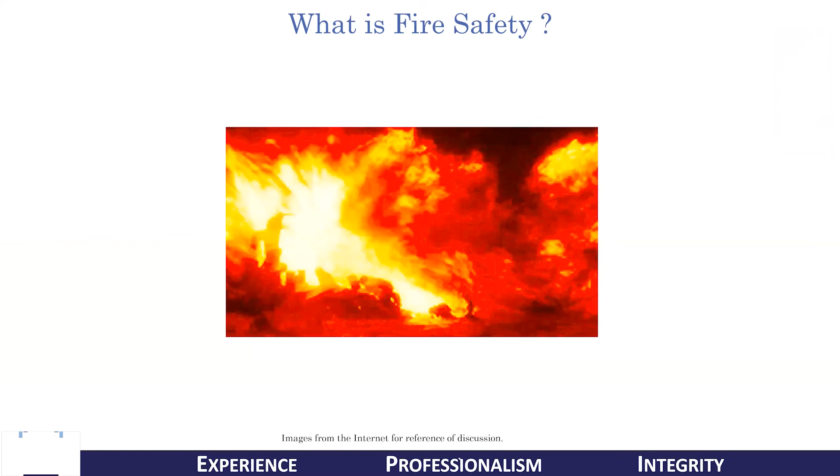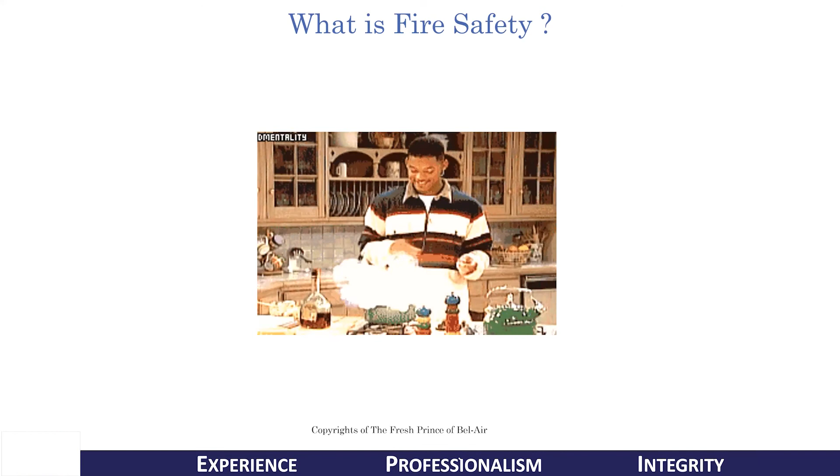Let's begin with understanding, and I'm going to talk about fire safety. Let me break the myth to all of you that it is not always a dramatic event that brings fire into a building. It is actually small and minor accidents that sometimes become a very, very big fire incident. Our focus is to make sure that in all the aspects related to all the stakeholders of building and construction, these small fire incidents do not become a big fire accident.

All of this is actions and thought correctly put at every stage, right from designing, when we are designing something, including building and construction when the construction is being done, and right up to when we are furnishing, planning, demarcating, rebuilding, as well as the occupant who comes in and wants to live, wants to occupy, and say, wait a minute, I want this here, I want this there, all through the life cycle of the building, right from designing or dream stage, as I would call it, and right up to occupation. There are several aspects where fire safety and other aspects of longevity and quality of a building come into practice.

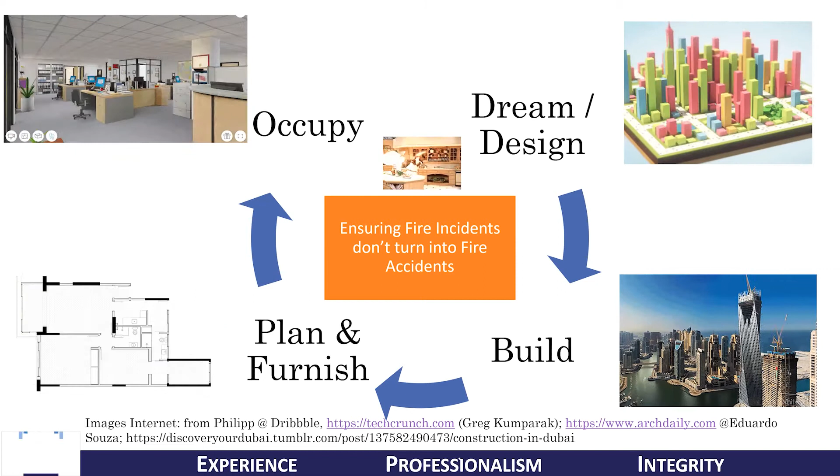Very often, it is easy for us to say, well, the building is designed as per the code, the building code. But it is extremely important to question and understand throughout the four phases of design to occupation whether these codes are current, are updated, and are factoring in some of the learnings, some of the accidents, some of the failures that we might have seen just a few months ago.

We all know that the problem of lag in change of codes, change of mandatory regulations, exists in every country. This is the reason why it is critical and important to have additional technical specifications, which are often written for all the projects that you can think of or bid for. So once we have this backbone ready, we have a code which has been published with decades and decades of experience of people in a given area or all over the world. But also in airports, malls, large occupancies where international consultants are involved who bring in their learnings from past accidents would always bring forth the latest, the current requirements in the form of technical specifications.

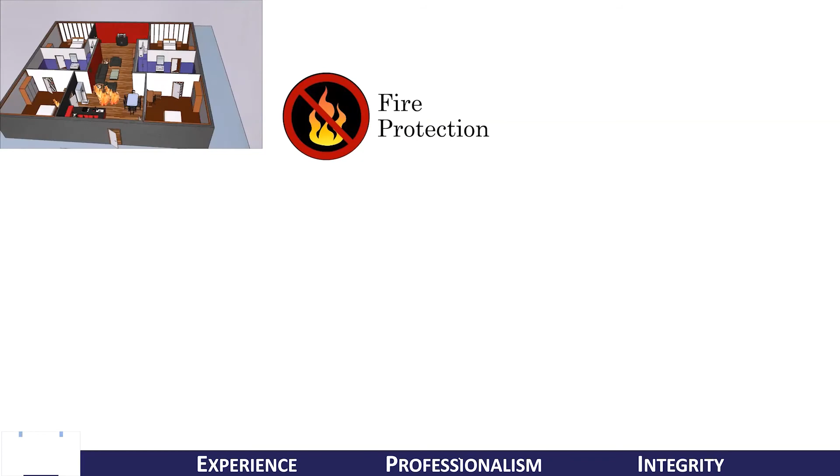With this as a background, let me explain, from my experience, how fire safety is achieved across the world. The concept of fire protection starts at the design phase, when people are planning the fire and life safety plan of any construction. They want to make sure that if a fire accident happens, as you can see in the video running on the top left of your screen, it is designed in to make sure that this fire does not grow into a big accident. How is this done?

The two concepts seen everywhere in the world: one is what is called active fire protection. So all the components, systems that come into action, that come into activation, whether they are detectors of fire, smoke, or sprinklers, get activated the moment they sense a fire and raise an alarm, call the fire tender, evacuate everybody.

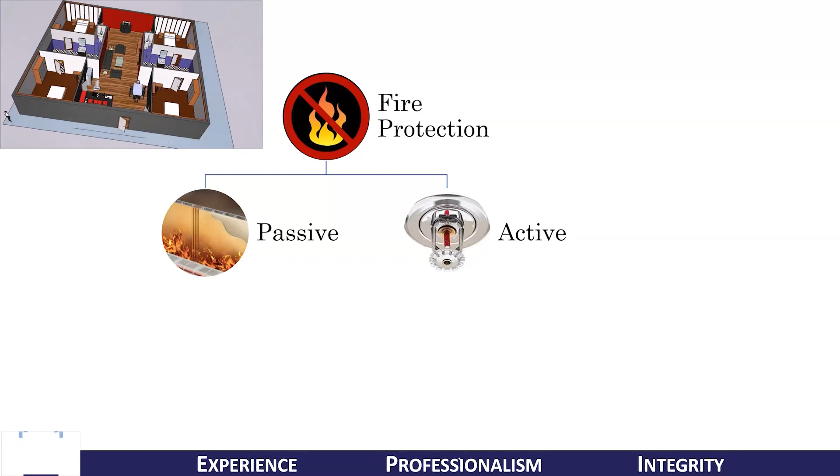All these systems which need to function properly are called active fire protection systems. And another equally important, and sometimes not given as much importance, are passive fire protection systems.

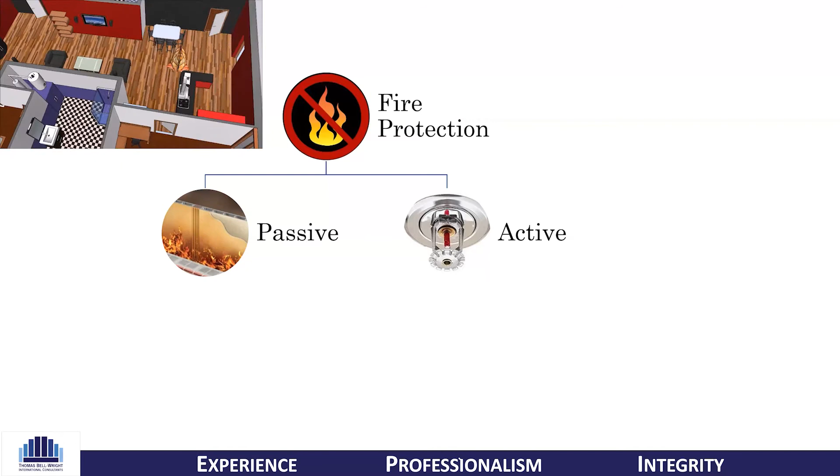What are these passive fire protection systems? Well, the concept is that if there is an initiation of fire anywhere in the building, in the house, on the floor, it should be quickly contained and compartmentalized in the section where the fire has happened so that the fire does not grow and escape all around.

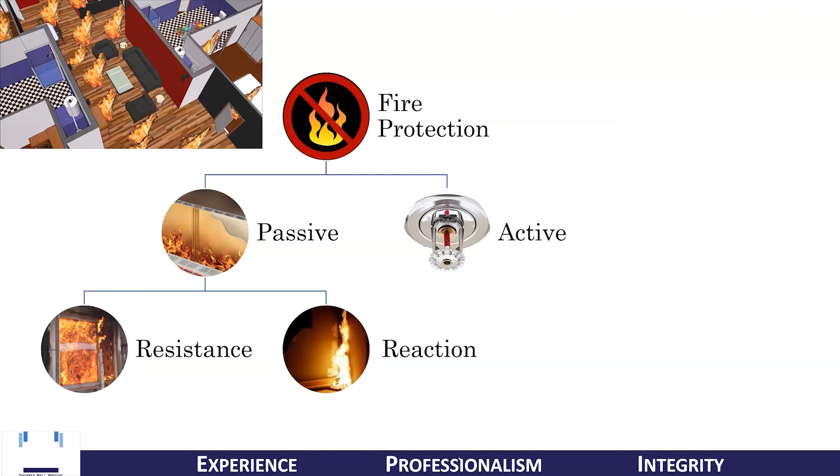This concept, which I will explain further, along with making sure that the interior finishing materials, the fire load, or the products, components and systems like upholstery and other things which are inside, do not react quickly to increase the fire and make the smoke grow.

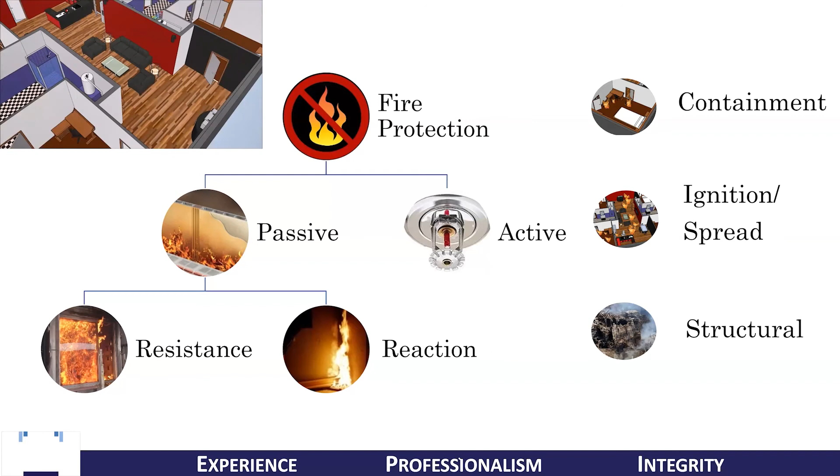So as we talk about containment, we talk about limiting the ignition, limiting the spread, as well as a very important aspect of structural fire protection, which means that the structure of the building should not lose its integrity if the fire temperature around the structure goes more than, let's say, 500, 700, 800 degrees, and the structure does not collapse, almost like the 9/11 tragedy that happened.

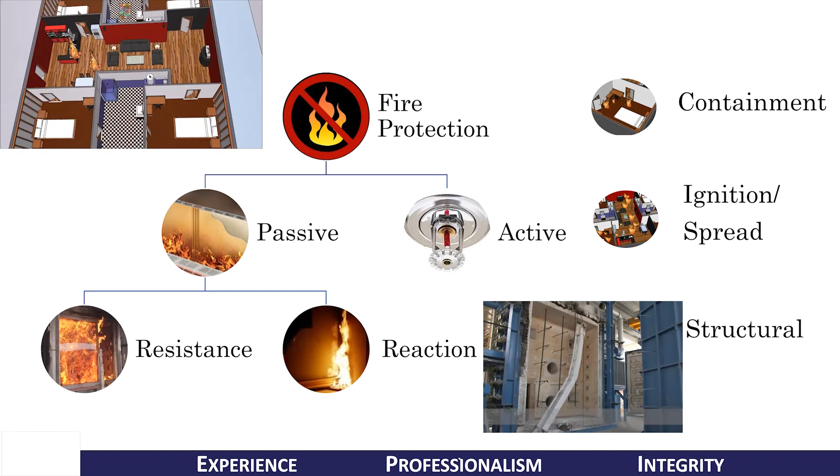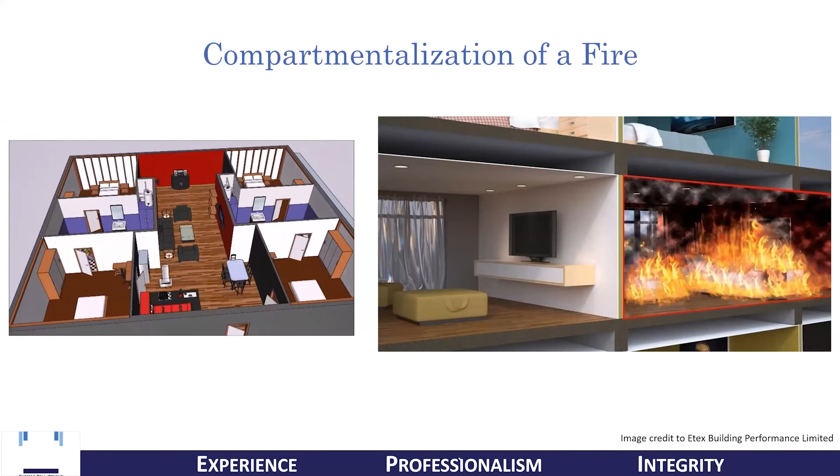So how do we really check that this is getting done? We start with, of course, having a test. We would test the compartmentalization by using a fire furnace.

What you see on your screens is part of our fire testing lab. And this furnace recreates a scenario, an environment of a fully developed, fully grown fire.

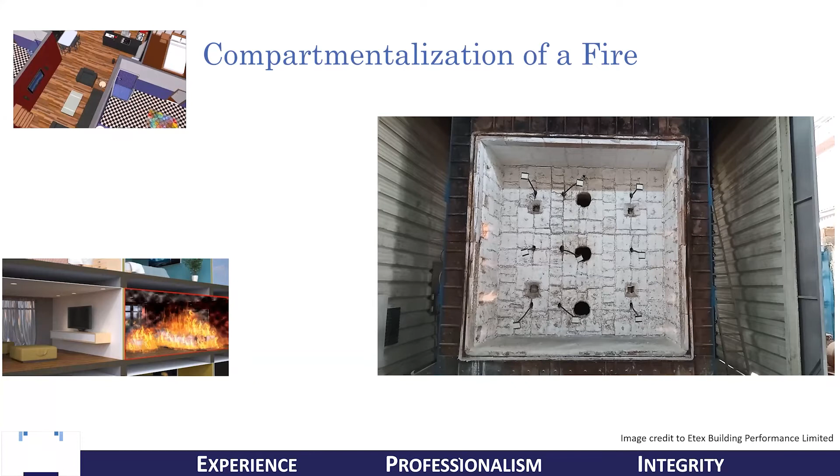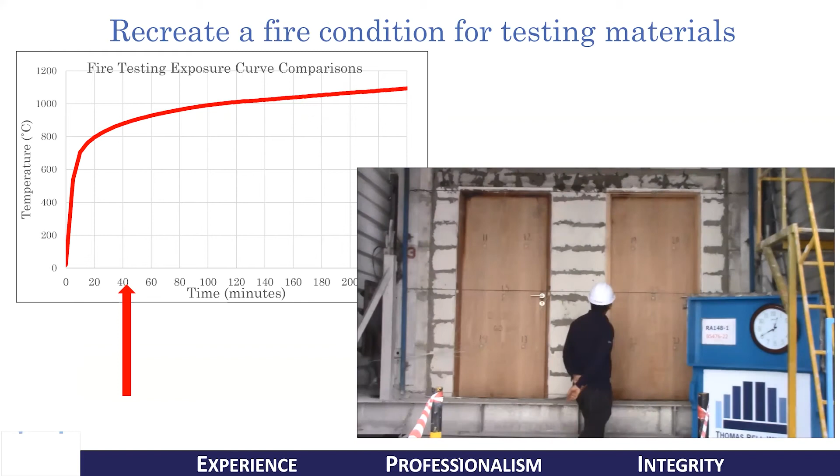With the help of this furnace, we are able to check by installing a compartment or a mock-up of a compartment. This could be a fire door, a wall, a damper, a duct, a fire stopping, or one of several different aspects of building and construction, which ensure that the compartment, which has been designed and installed correctly, is maintained for the given duration, which could be 1 hour, 2 hours, or 3 hours - enough time as per the design to evacuate the complete occupancy and get the fire tenders in who will control the fire.

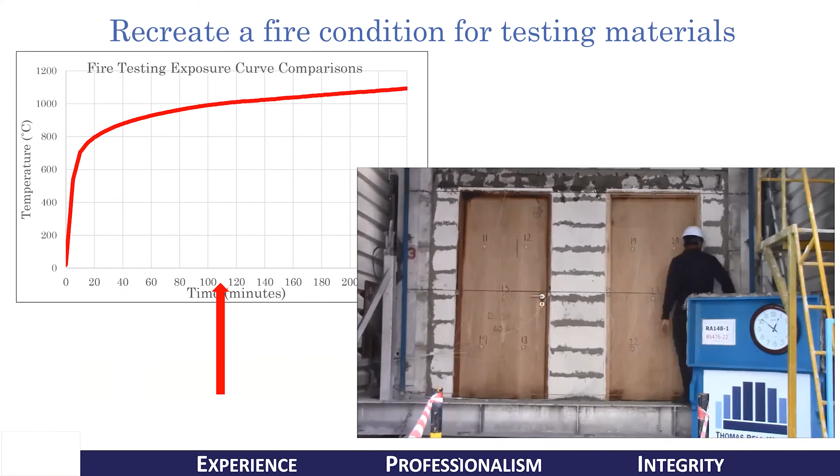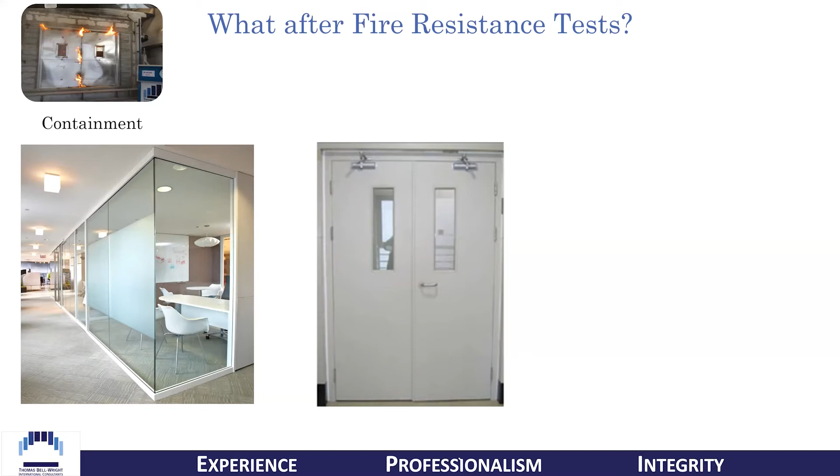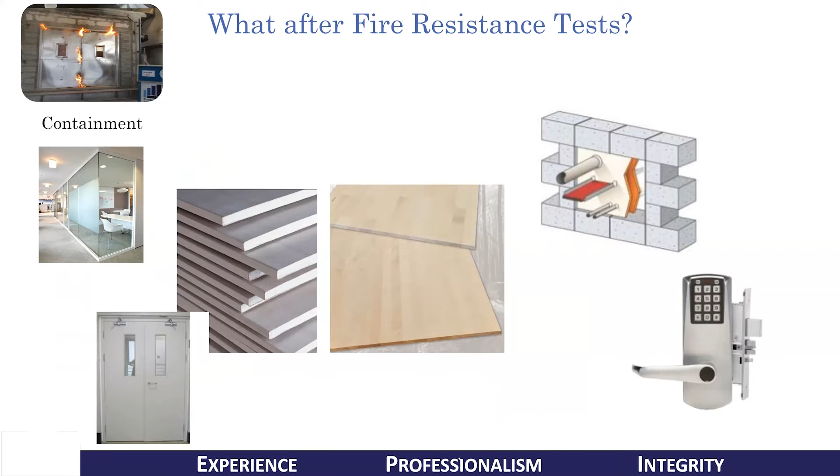Now, while we know that this is how a fire test could be done in a facility or laboratory like ours, it is very important to understand what happens when you conduct a test, because you can test a mock-up of a door or a partition, but what is this built of? You would have wooden planks, gypsum boards - so many aspects that come together and build a fire partition.

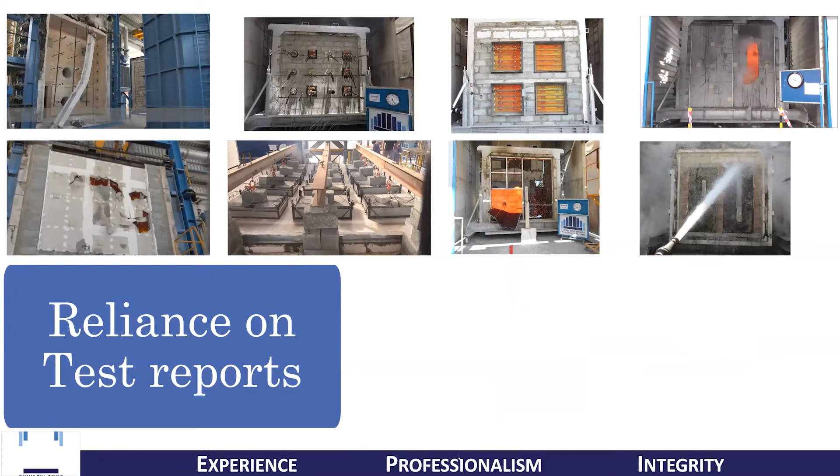But often these are manufactured in a manufacturing location and installed at the site. So how do you make sure that what the test has been done in the laboratory, and you see a test report on your table, is representative of what you will get on the site? What links the test report with the materials coming in at the construction site?

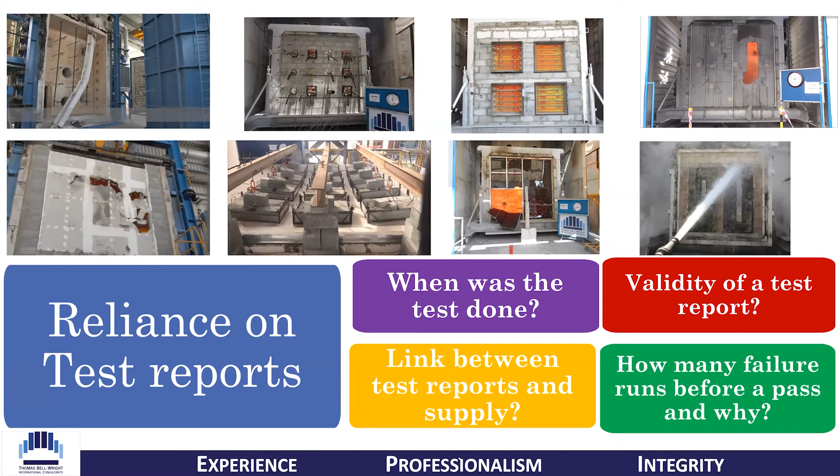And this is key across the stakeholders of the construction process, from one end where you have the National Building Code or the technical specifications saying materials and components need to comply with certain test methods. How do you make sure that a given test report, done in a given laboratory, is representative of what is happening at the construction site?

And this is where I take up my first case study very quickly - how do you ensure, with an example of a fire door, that all aspects - design, components, materials - which were listed in a test report are the same as what is happening on the construction site.

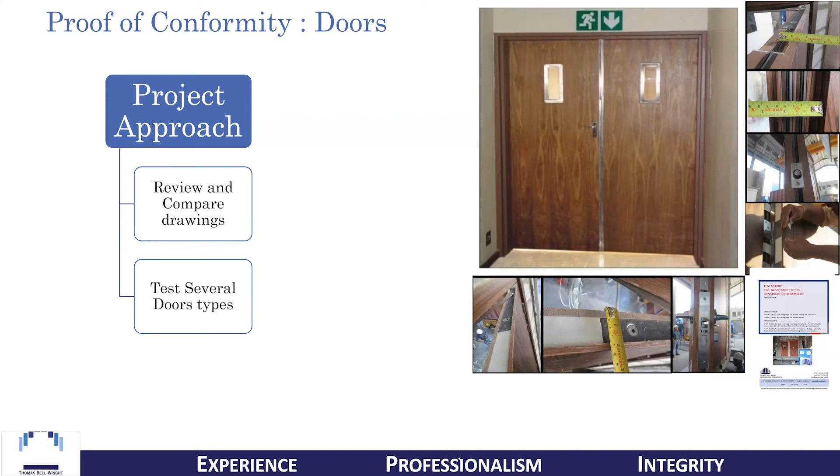So one of the very tedious approaches which some projects take is that for each construction happening, the subcontractor or the consultant will select certain doors and randomly send them to the lab to do these tests. And then there is another approach, which is the supplier approach - there is something called certification and listing.

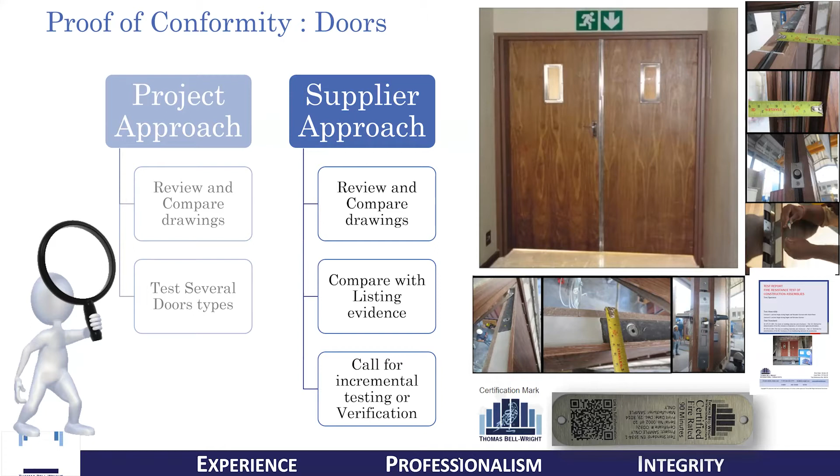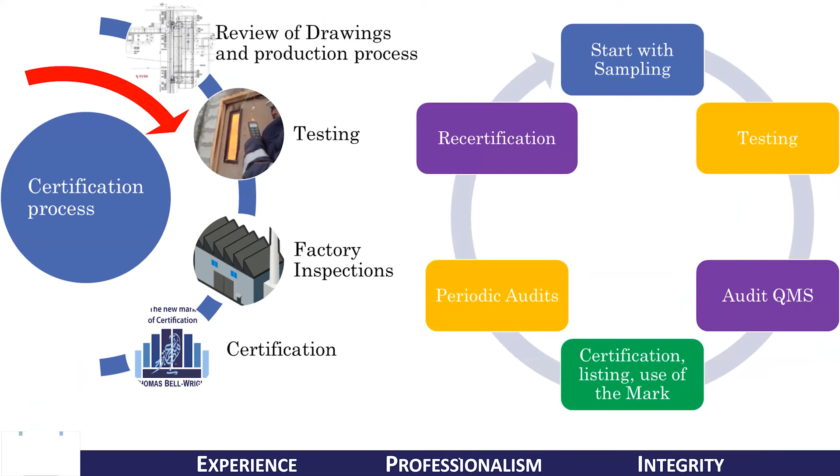This certification and listing is often done to ensure repeatability of offering, as the manufacturer's facility is audited regularly. What this audit typically results in is a verification or assurance that each time a door manufacturer, board manufacturer, or any product manufacturer produces a given product, its details can be verified on an online certification directory.

And this certification directory, whose details are often linked with a certification mark or label which could have traceability, will list every aspect which can be verified at the construction site.

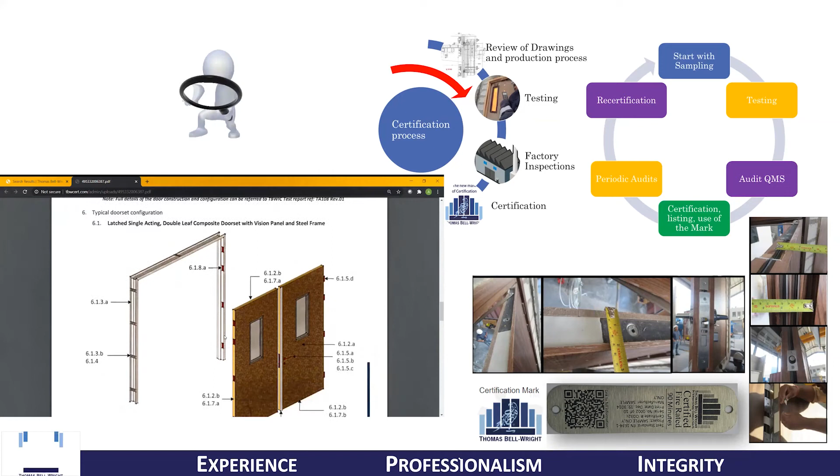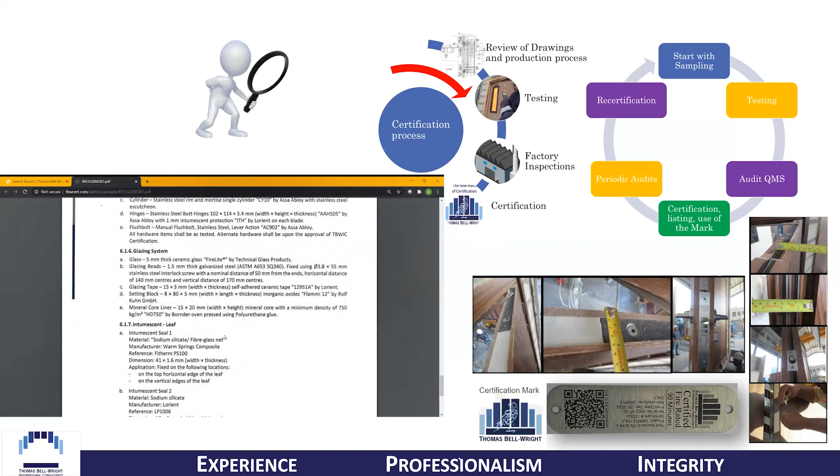In the small video running on the bottom left, you can see the listing of a fire door that we have certified to comply with UL standards or North American standards. All the details of the door are made public. You can review this at the certification directory, tbwcert.com. Not only can you verify whether the certificate is current, it will also verify that the certification body is auditing the factory regularly, so if there's a label on the door, all the details are public and can be cross-verified from the construction site. This level of assurance is needed now and is mandated in most countries.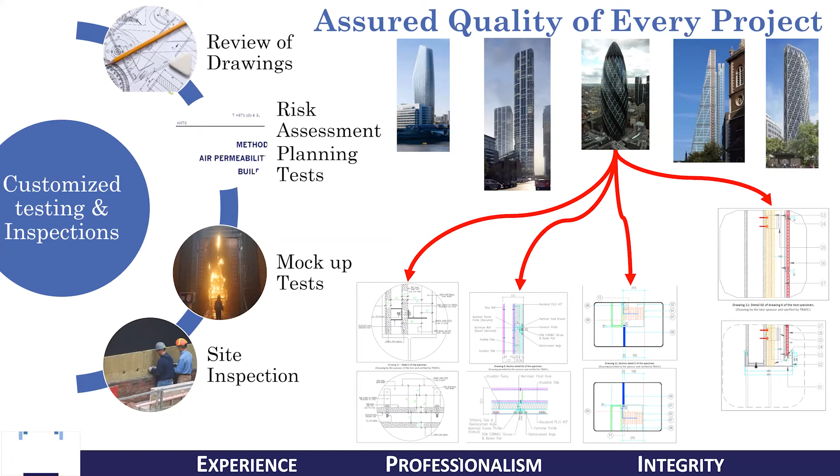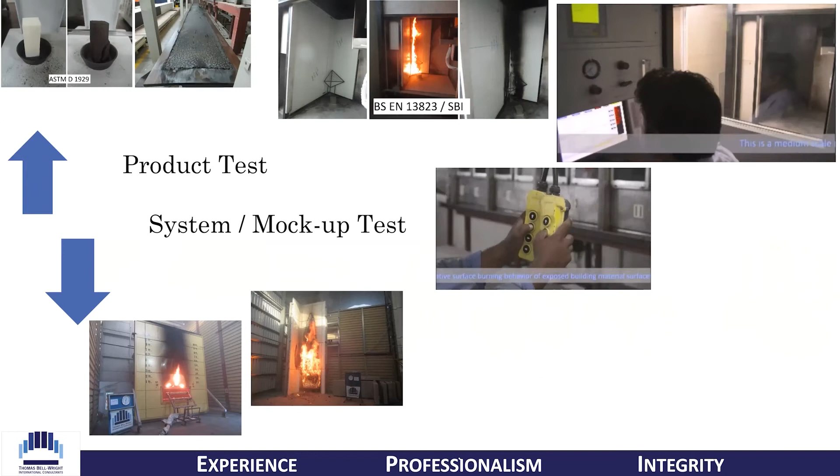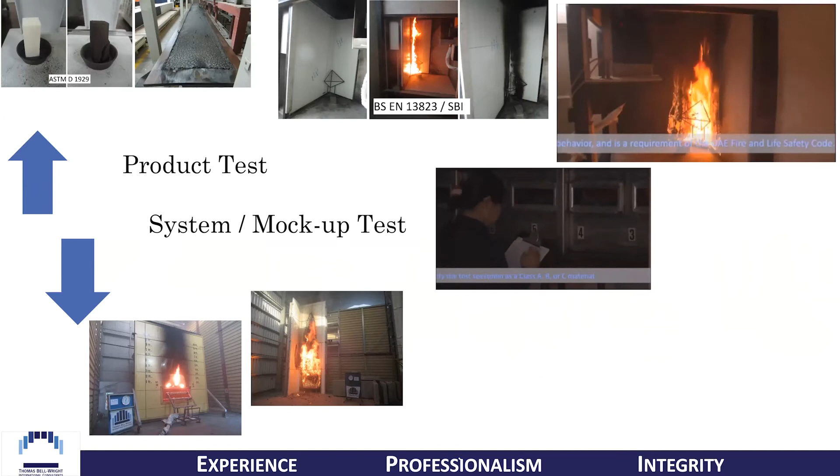Moving to one of the hottest topics of today, which is facade or cladding fire safety. A very often ignored aspect is that the whole facade which is built can be represented by just one or two tests, and that may not be the case. You could do material tests and validate material behavior, which could be the facade element, the insulation material, the sealants, and so many other aspects, which you could test for ignition or flame spread as an independent material.

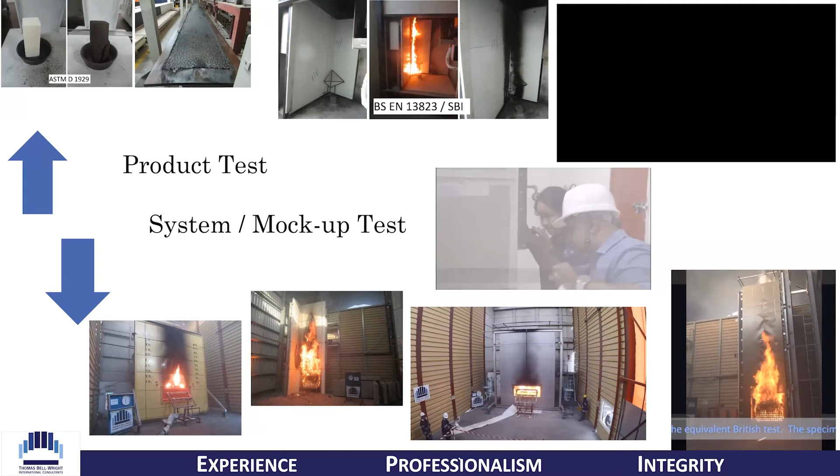But it's equally important to understand that in every building facade, there are sometimes a few dozen, but sometimes hundreds of different design details where components and materials make up different subsystems. These specific subsystems need to be validated by doing several mock-up tests, not just one, but several large-scale fire propagation tests.

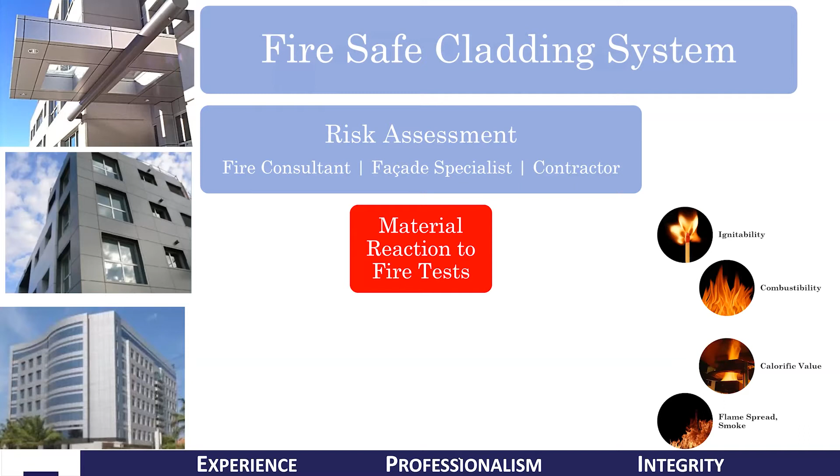So in a quick summary, to ensure the cladding system is fire safe, it starts with the fire consultant, the facade specialist, and the contractor doing a risk assessment, checking various reaction-to-fire properties, not just by tests, but by ensuring traceability of materials using certification and listing, and evaluating which sections of the facade or building envelope are high risk, because components and materials with low ignition temperature, high calorific value, and very high flame spread could be coming close together in a given section of a facade detail.

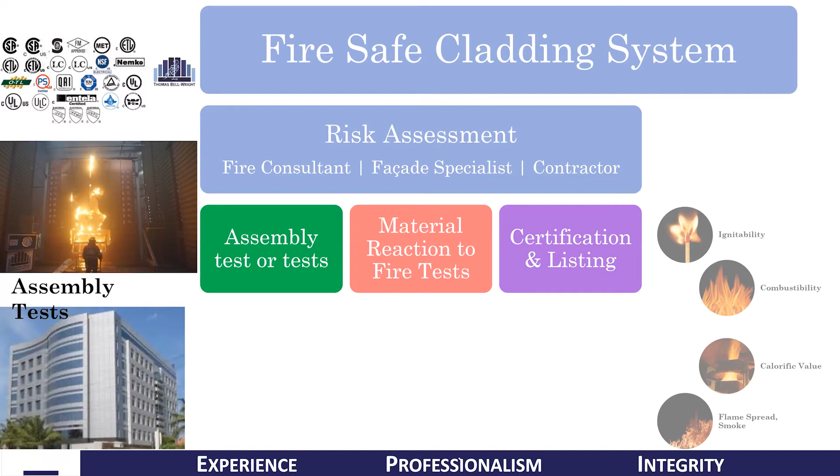And these need to be mocked up and validated to ensure they will not cause a big fire accident. But this validation is not the last step. Someone needs to check at the construction site and inspect that what has been certified is what has reached the construction site.

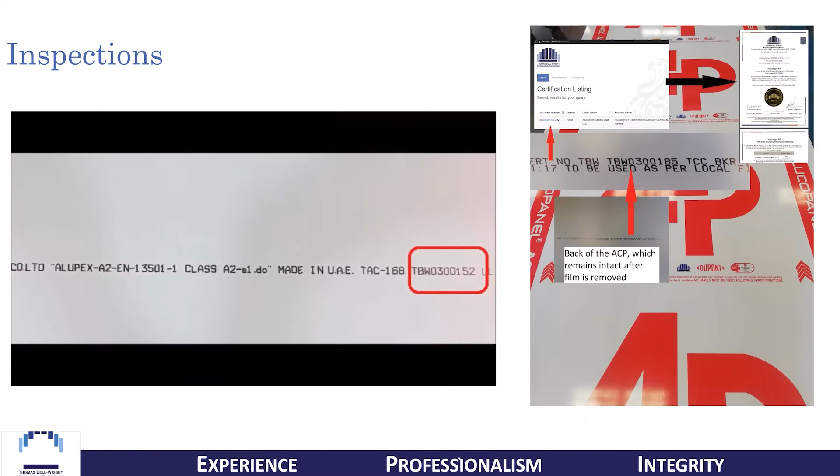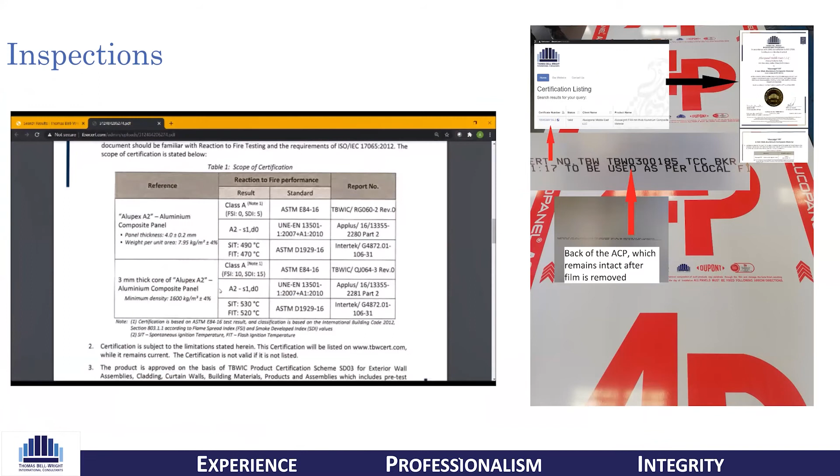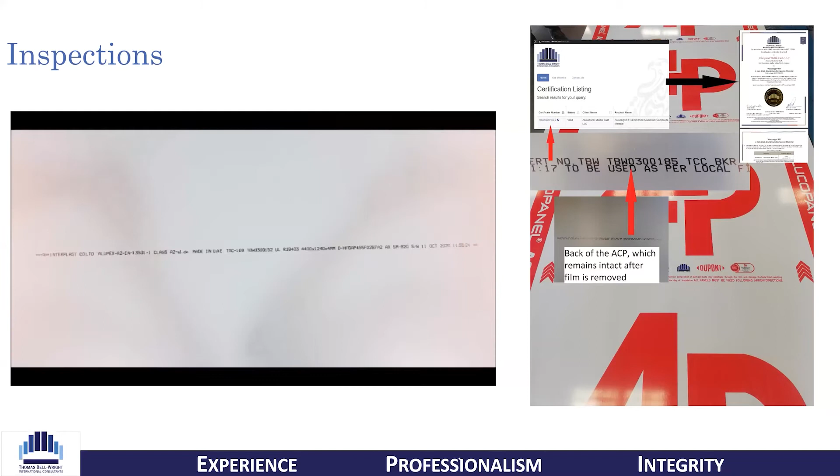As you can see in the image, the back of an aluminum composite panel which reaches the construction site has all the details with the help of a ticker tape. The number is written, and if you track the number, you can look at the certification directory to not just check whether the certificate is valid, but also to see what the product should look like and what its components are. If there's a mismatch, it means you've been cheated - someone has given you a different test report or certificate and supplied a different material. This core concept remains the same across all products.

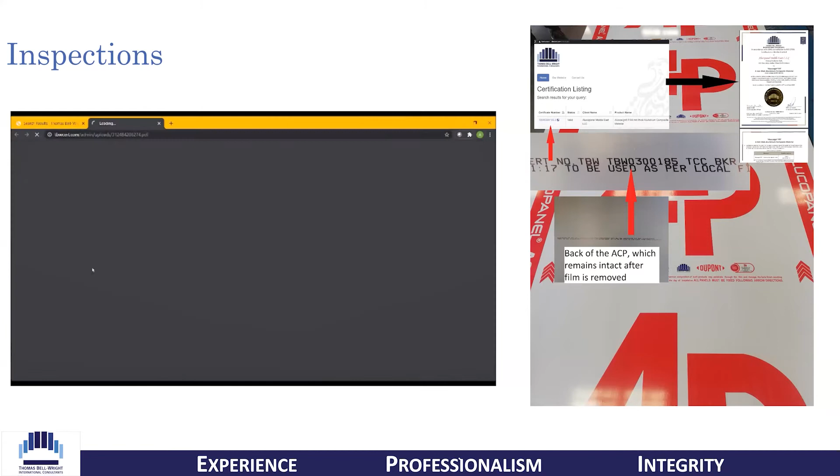So with this, I will end and pass to my colleague Julian, who will talk a little more about how other properties of the facade are very important. Over to you, Julian.

Thank you, Abby. Thanks for that, very good, very informative. Just want to say it's a real honor to be with all of you guys today, and I feel sort of privileged to be able to speak in such esteemed company.

I'm going to be talking about changing facades. So let's see, let me get the screen up, and hopefully you can see the presentation there.

Okay, with changing facades, fundamentally we change facades for two reasons. Aesthetics is very much a main thing that we look at first, but then we also have to consider function - the function of the facade, what we expect from it, how we expect it to perform.

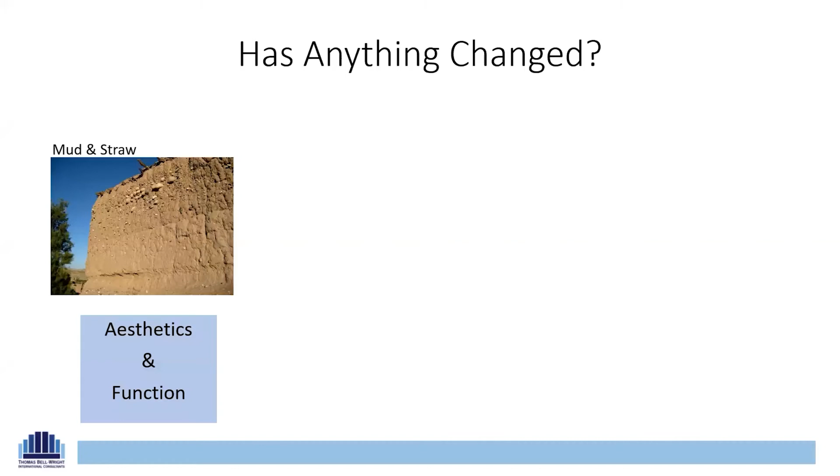Has anything changed? Well, yeah, a lot has changed. We started with mud and straw walls - that was our facade. Functionally it worked very well, it served a purpose. As time's gone on, we've experimented with other materials, whether it be timber, stone, brick, or concrete. But as you can see, with mud and straw the aesthetics weren't great, so we moved on to other materials.

With concrete, sometimes grey and quite dismal, but at times we've tried to use that material as well, and that was used back in 1962 for the Palace of Assembly at Chandigarh. So there's always been this desire to make what we create aesthetically attractive.

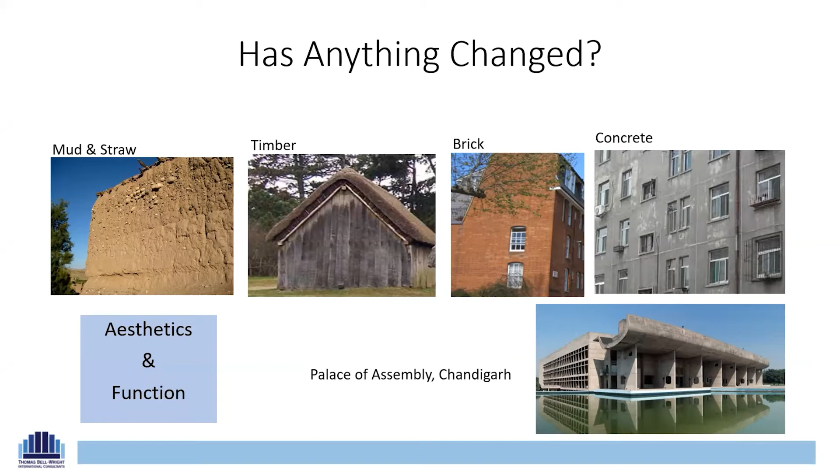It's a fact that if a building is more attractive to look at, it will have a higher sale value. It'll attract more leaseholders and its value will be more. As time has gone on and we've gone through changing aesthetics, we've had an influx of new materials which has enabled us to create wonderful structures and buildings, giving a dramatic impact to facade systems and ensuring we're attracting the right kind of people that will pay a good rate for leasing and purchasing.

Developers like it. Developers want to make their buildings unique. They want to make them stand out from the crowd, and we'll look to experiment with different materials and different structure types. But one of the things we have to take into consideration is that changing facades is about aesthetics and function.

So whereas it's great to use these materials to develop interesting facade systems, if the function is not there - for example, if we've got a building with air leakage issues because the facade hasn't been designed and assembled correctly - we're air conditioning inside the building and then losing that air as it escapes into the atmosphere through the facade. That impacts on costs because costs go higher, it impacts our energy consumption, and that impacts our whole purpose of sustainability and being environmentally friendly in construction.

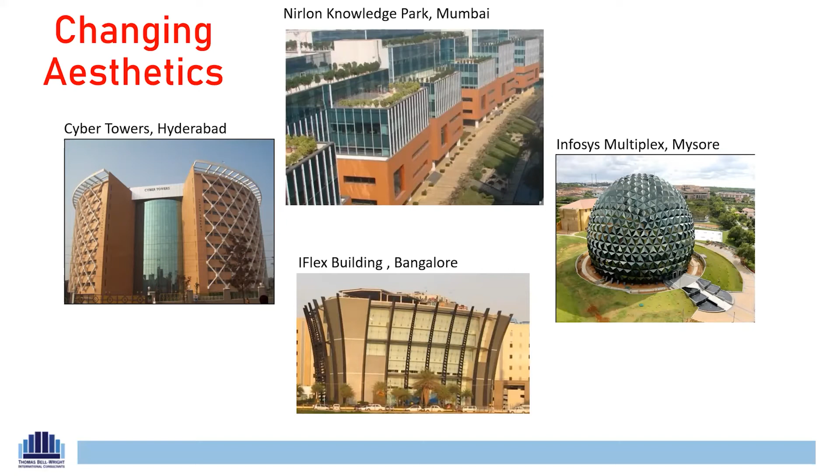So we have to make sure that in our desire to create more attractive facades, we don't develop issues and sacrifice function - areas where doors or windows don't fit properly, allowing air to escape from the building. We don't want situations of water leakage or water penetration that make the building unattractive. People don't want to live in a building that leaks - it's very simple. And we don't want condensation issues, water getting into our frames, discoloring them, causing early corrosion on some of the systems. So we have to make sure the function of the facade performs as it should.

With all this technology that comes along with these materials, it's often the case nowadays that major projects will look at a facade specialist. Facade specialists - you go back maybe 30, 40, 50 years ago, they didn't really exist, but now they're needed. It's important that we bring in facade specialists to look at the design and the function of what we're doing with facades.

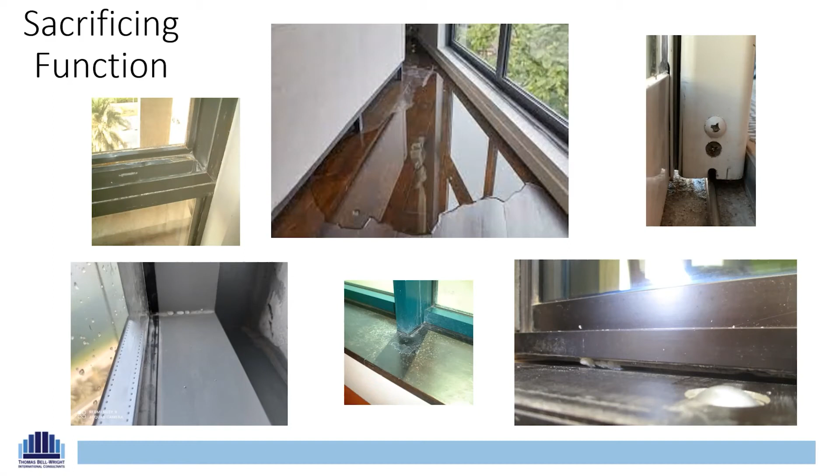It's a very important issue that what we look at with facades is the detail, and that's what often gets missed - the detail of what we're doing. The facade looks great, it might look like a simple piece of material, but how does it fit? How are we fitting it? What materials are we using?

It's interesting that with materials, we embrace new materials and we want to put them all together. My colleague, Mr. Mutaz, will go through a case study which very clearly illustrates that sometimes materials aren't compatible - sometimes materials don't go together. So whereas we want to embrace these new materials, whether it's titanium, solid aluminium, PTFE coated glass fabric as used on the Burj Al Arab here in Dubai, or even recycled rubber - these are all materials being used for facades, but we have to look at how they fit together. Often that is what gets missed, and then we have functioning problems with the facade system.

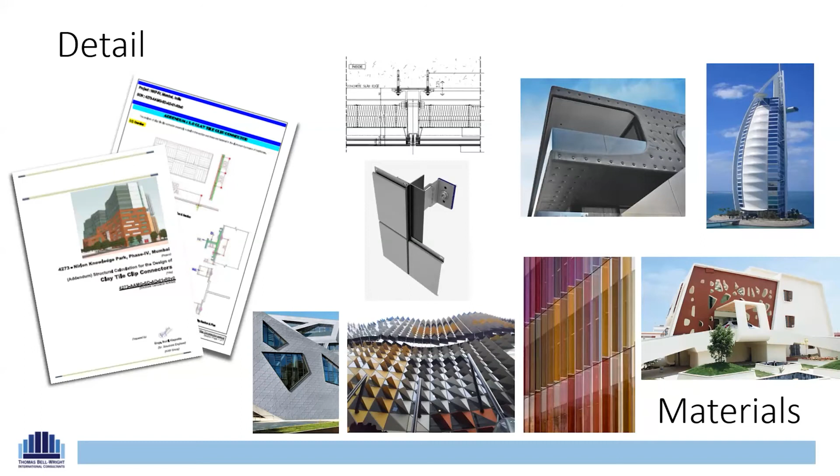Now, one of the most important aspects with new materials that we need to be cognizant of is fire. We need to make sure that whilst we're developing and designing attractive facade systems, they're not going to spread fire, that we're not going to have issues. The only real way this can be addressed is through fire testing. I'm not going to labor on this too much because Abhishek has said quite a lot with regards to fire testing. But with facades, when people get enthusiastic about new materials, that's great - that's what we like to see. But at the same time, you've got to take into consideration what the impact is.

We have a responsibility when designing and building buildings that the occupants are not at jeopardy and not at risk. So it's imperative that with the new materials we like to bring into our facade systems, we do look at the fire implications.

Typically what a lot of people look at these days is curtain wall systems for facades. The first thing you'd look at is whether we're going to use a unitized system or go with a stick system. These are systems very much determined by the size and stature of the building you're working with. But an integral part of the curtain wall system is the glass.

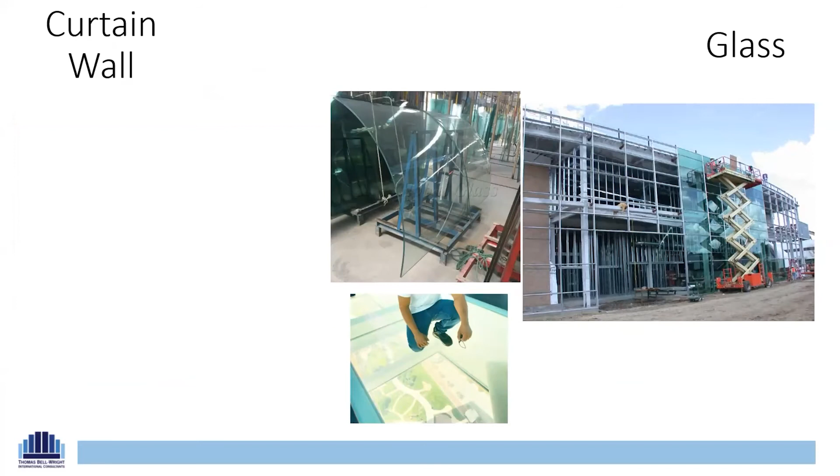The glass has moved on very much from what was a basic format many years ago. We've got double glazed and triple glazed windows nowadays. We have tempered and laminated glass, glasses with various tints, self-cleaning glass, glass you can walk and jump on, glass that's curved and shaped. And nowadays we even have smart glass, which detects the UV coming into the building and adjusts itself accordingly.

Architects like glass and they like to work with it. It enables them to create some iconic buildings, enables them to create beautiful shapes for the buildings. So whilst it's nice that we have all these options with glass, again, what about the functionality?

Glass will have a thermal insulative impact straight away on the building. So without the right glass, what happens? The building gets too hot, the air conditioning has to work harder, and the operating costs for that building, the utility costs, start to increase. There's an energy impact there—we're using more energy. The sustainability comes into question. Have we built an eco-friendly, environmentally friendly building? Well, no, because if we're using too much air conditioning, then we're not.

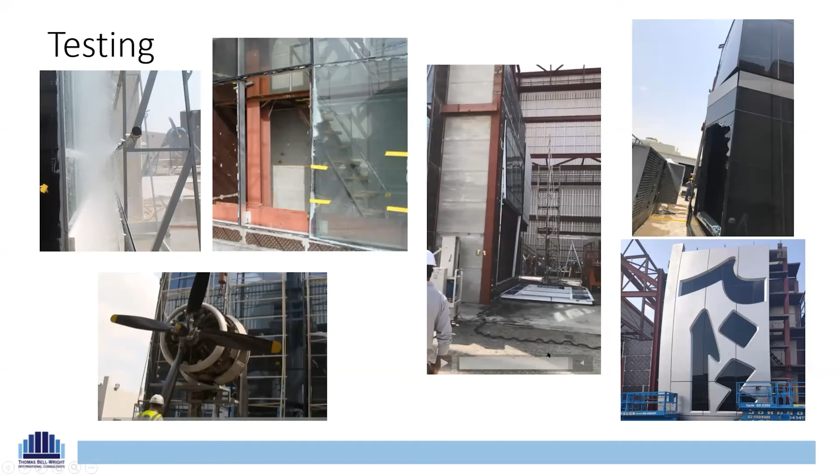So it's all about the function, it's all about the aesthetics. So changing facades—it's a short presentation just to give you a feel for facades and how they've moved on, and how we have a responsibility to ensure that facades function and not just look good.

So yes, facades have changed. We all have a responsibility not just for the aesthetics, but it's critical that we look at the functionality and the safety of the installed facade system. If we've not got it correct, if we haven't done our homework, if we've not done it right, we are going to have issues and problems.

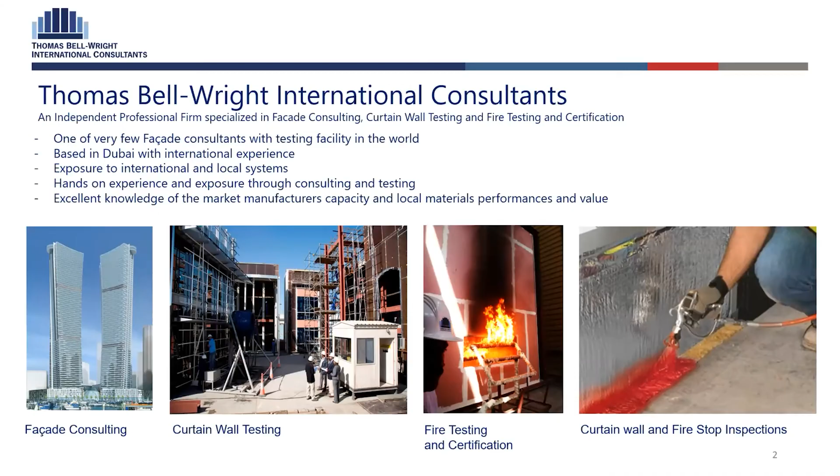As already a lot of you know, we're Thomas Bell-Wright, an independent professional firm specializing in facade consulting, curtain wall testing, and fire testing and certification. We have 27 years of experience, more than 100 employees, 15 nationalities, 200 completed projects for the consulting department only, and 700 plus clients. Mostly they're happy.

In the consulting department, we offer 3 main packages. Today we'll talk about facade failures, which is under the investigation, forensic investigation, and special inspection department.

I want to start with a story. One day, on a summer day, GM customer service received a complaint from a customer saying, my Pontiac is allergic to vanilla ice cream. They laughed, they thought this cannot be real. How can a car be allergic to vanilla ice cream? The problem, according to the customer, is whenever he orders vanilla ice cream, the car won't start, and whenever he orders any other flavor, the car will start. One of the engineers took this as a serious complaint and investigated, and it turned out to be something called a vapor lock issue, and GM redesigned the fuel delivery system to resolve the issue.

My point is sometimes the problems are packaged according to the customer's point of view. Keeping this in mind will help us better understand the studies that will be presented after, so that we understand how each investigation is unique in the way you tackle it.

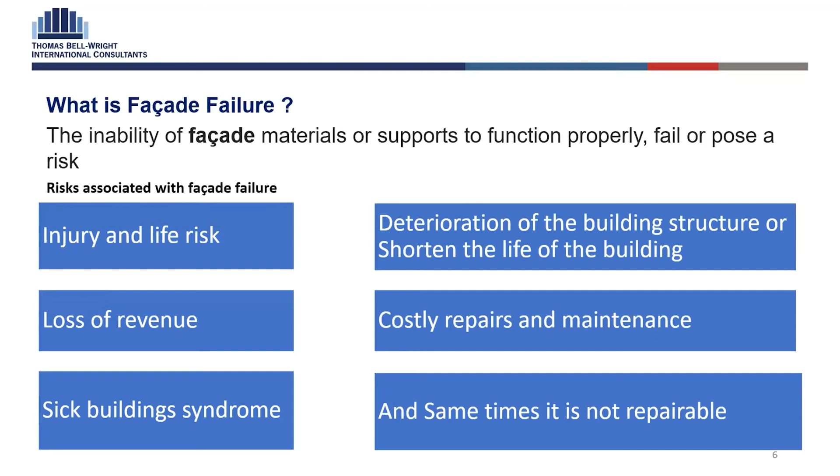Today I'll be presenting 3 case studies. However, due to confidentiality, the project details, names, and location cannot be disclosed, so you have to trust me on this one. The case studies are codenamed the Villa, the 50+ Tower, and the Unrectifiable.

There are several things in common for all these investigations. All the projects had 2 facade consultants already that reviewed the drawings. Rectification work sometimes involved removing complete facade units, and this is an expensive investigation. Imagine having 5 engineers working for 10 to 15 days, sometimes 20 days, putting ideas together, turning each nut and bolt, trying to find an answer for what went wrong.

For case study number 1, the Villa, we received an inquiry. It was a very simple inquiry: mold and mildew on wood. The wood is very expensive, apparently sourced from Scandinavian countries, and specially treated for a VIP client. So we proposed several actions to be taken in order to address the issue.

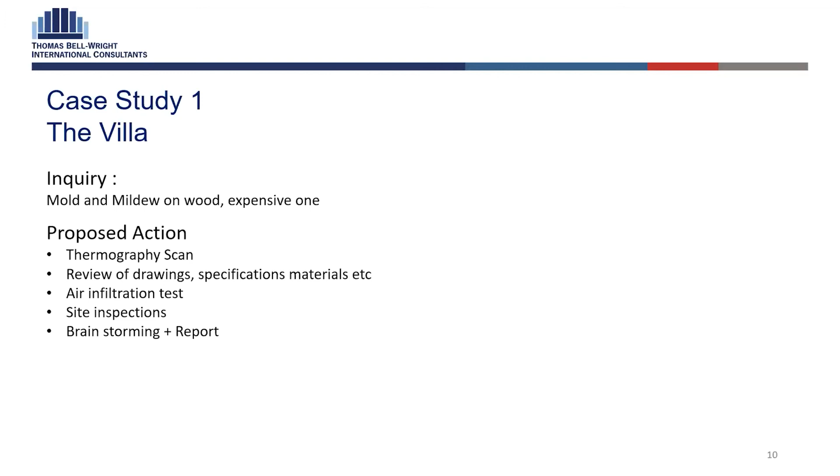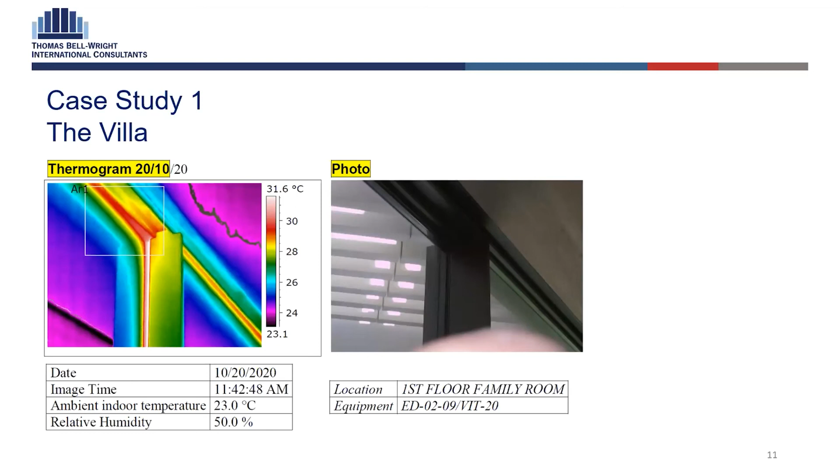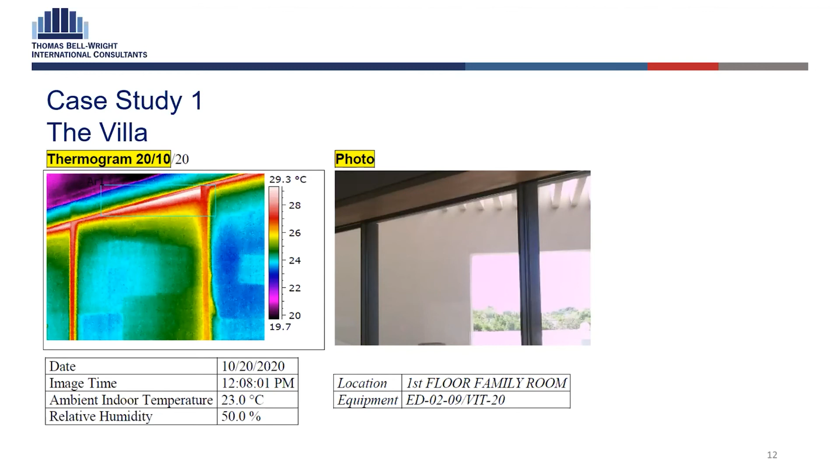For people unaware of thermography, this is a thermography image. Basically, it measures the temperature of various surfaces. Whenever you see red, that means hot air is coming from outside into the air-conditioned space. It is expected to see hot air around the glazing, because this is usually the entry point of all the glazing - it is a weak point. Again, you can see the red around the glazing.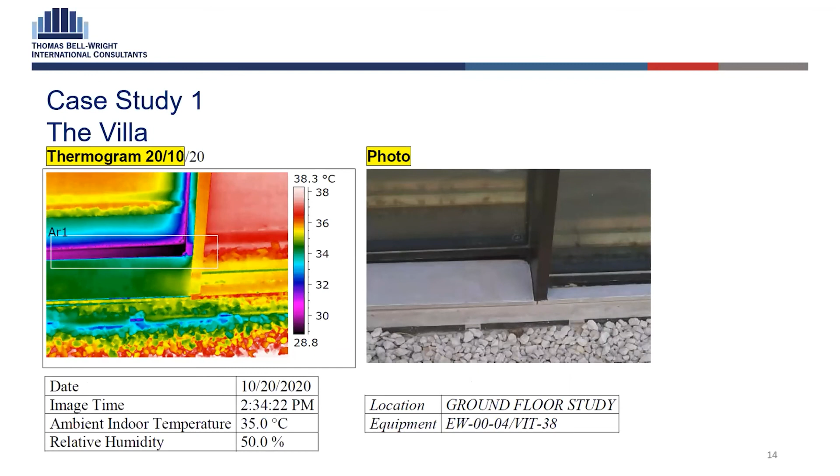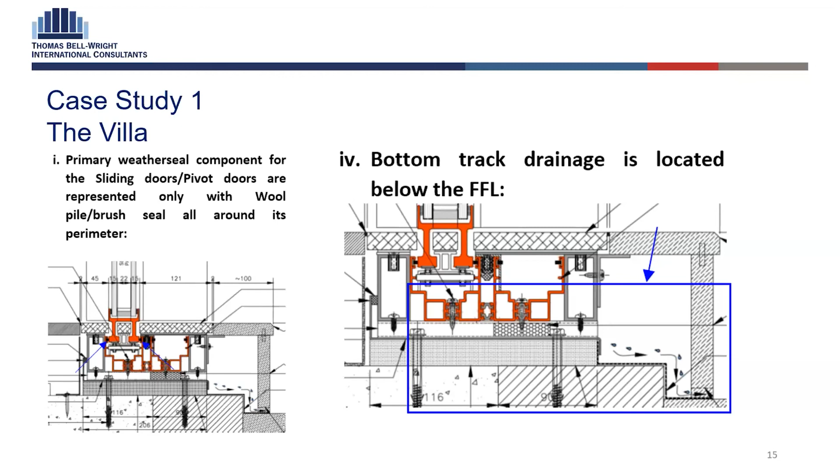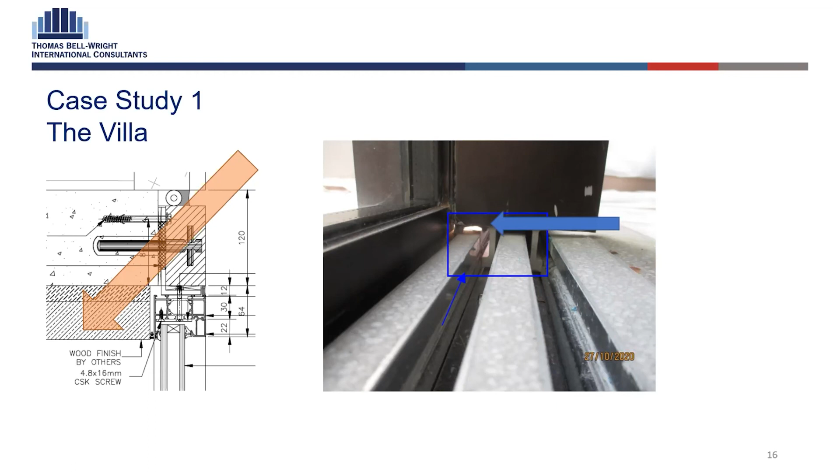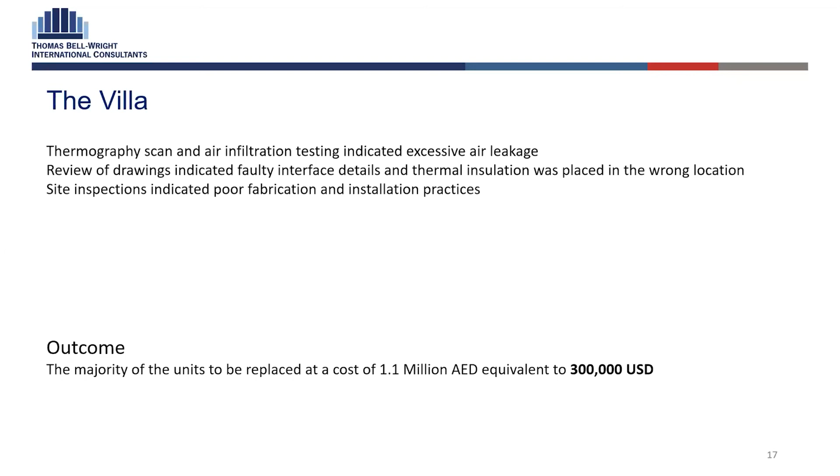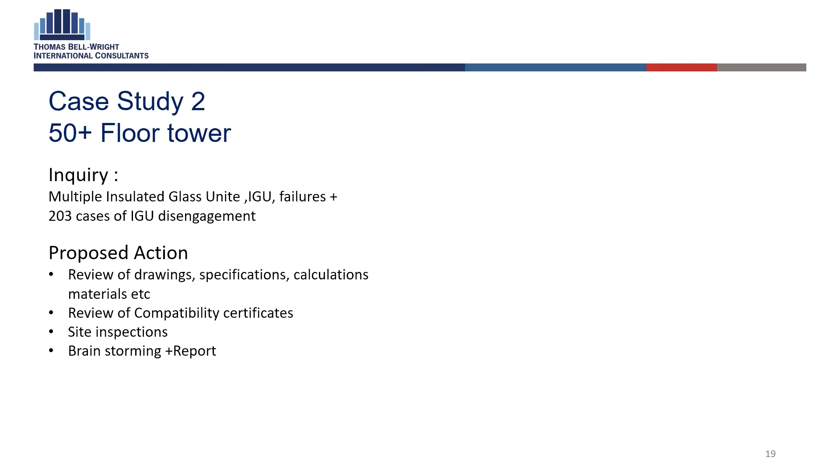As with most investigation action plans, we started with review of drawings, specifications, calculations, materials, etc., review of compatibility certificates, site inspections, brainstorming, and finally the report. The starting point of any investigation is always to try to find a pattern, a frequency, location, and facade orientation, time frame of failure, unit type, etc.

Facade failure investigation is usually done by either traceability of cause and effect association, or elimination and exclusion of probable causes. From the inquiry and preliminary analysis, it was very evident that this is a sealant failure issue.

Since different batches of glazing and sealants were used over 3 years, product defects were eliminated from the list, such as expired material or faulty batches. You cannot have the same faulty material for 3 years without somebody knowing about it.

Furthermore, processing of the insulated glass unit spanned over 3 years. Therefore, it is almost impossible to have the same processing fault or contamination for such a long duration. Therefore, processing fault as a primary suspect of debonding was eliminated. A systematic process such as sealant mixing ratio is not possible to go wrong for the complete processing period.

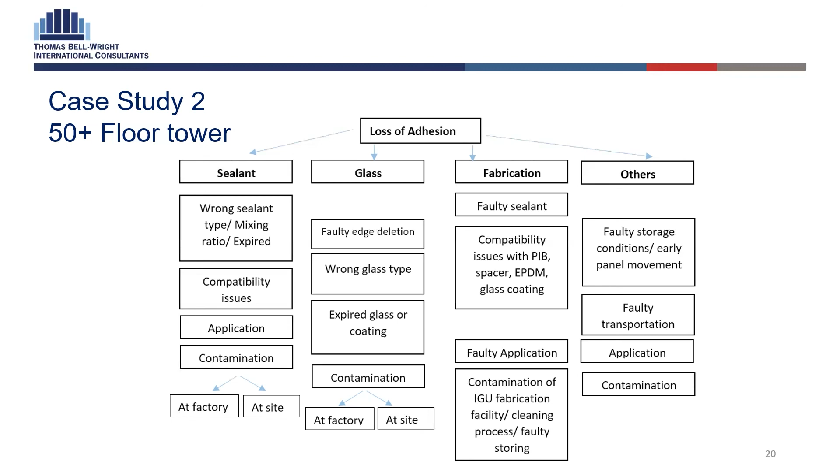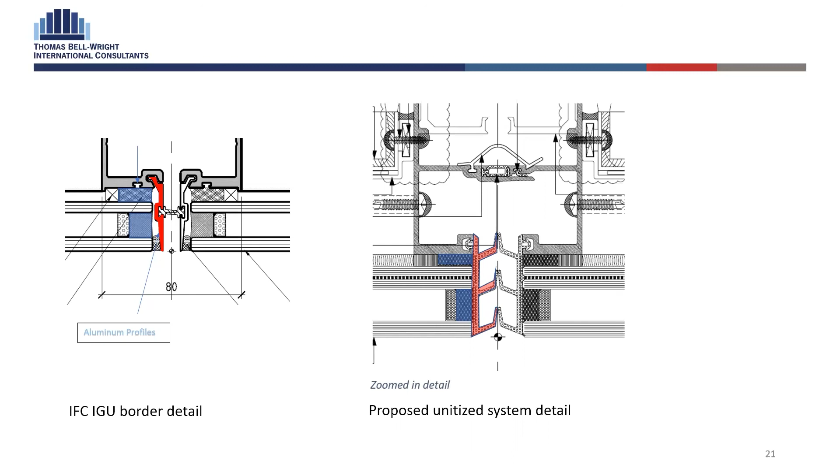So what did we learn from this? Despite the fact that the contractor proposed a better detail in terms of thermal performance, it had a major design flaw. They say the devil is in the details, and for this case, unfortunately, it was very true. Compatibility testing of various items in contact with chemicals is a necessity, not a luxury, for all facade elements.

From experience, we can say compatibility issues usually constitute approximately 20% of all building envelope glass failure investigations. The final recommendation for such a catastrophic failure was to replace all the glazing units, at a cost of $6.5 million US. This was easier said than done, since the building was already occupied and operational. This is the end of case number 2.